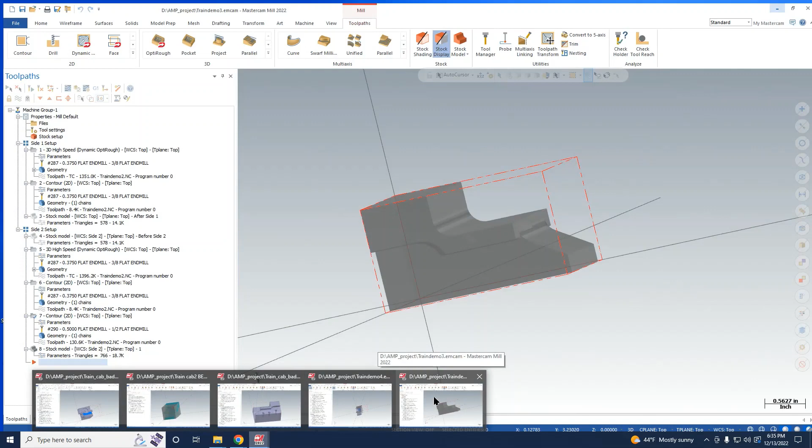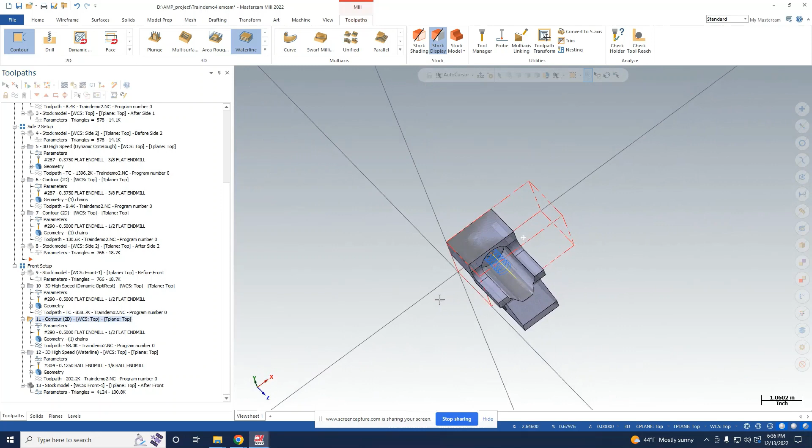I just wanted to add something. The contour pass actually worked, and I think I know why it didn't work before—it's because I didn't align the tool plane with the world coordinate system, so it was machining from like the front.

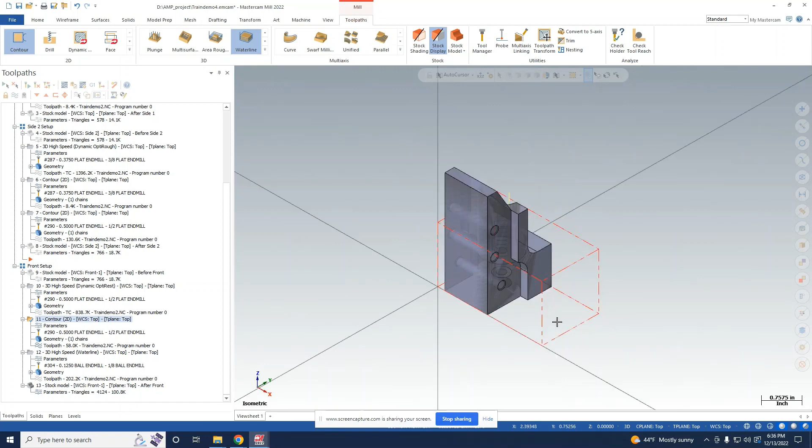You don't necessarily have to align it, but you usually need to understand which orientation it's working from. For example, here we want the tool to go from the top so it can clean it up. Otherwise, if it's going from the front, it's going to machine through the body.

So it's designed to go from the top, so we're going to make sure the tool plane is at the top. Let's delete this, and I'll show you how to do it again.

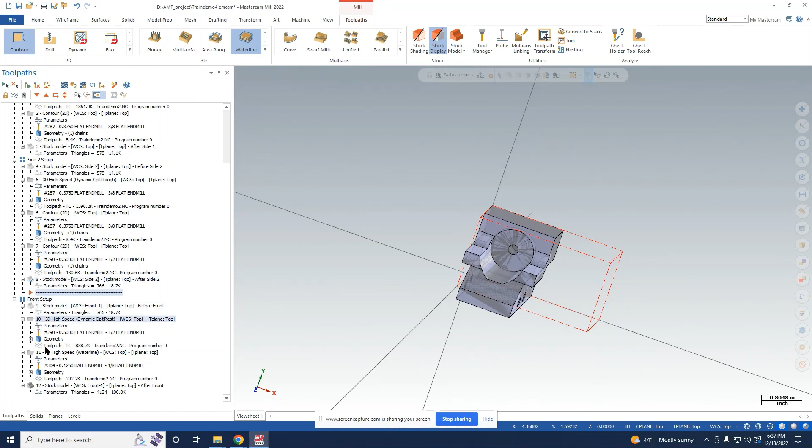First, we need to move the red arrow over here, which tells the program where you want the next pass to be. So we're going to do the contour, and we're just going to select the bottom loop, and we see it's going this way, which is correct.

That's climb milling, rotating clockwise. Actually, never mind—that's wrong. It should actually be going up, going this way. So we're going to reverse it.

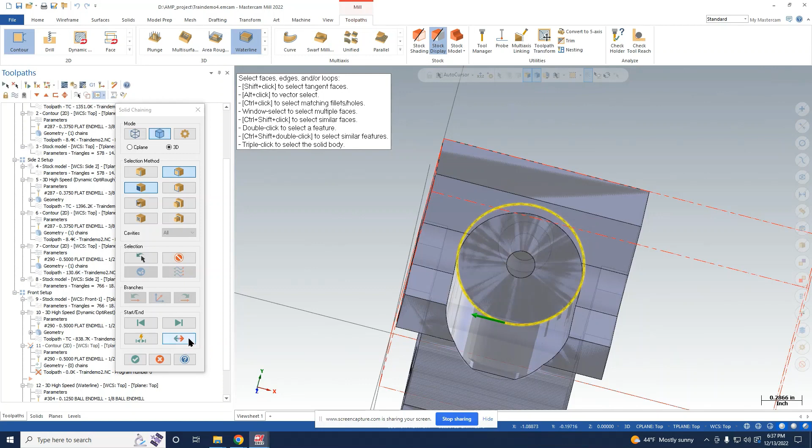Yeah, so that's correct. The parameters are the same from last time using contouring, so pretty good—0.1, and then linking parameters.

It should be correct. I can double check the depth if you just check this. So everything is right—this actually might not be right. So the top of stock is here. Yeah, so it's a little different.

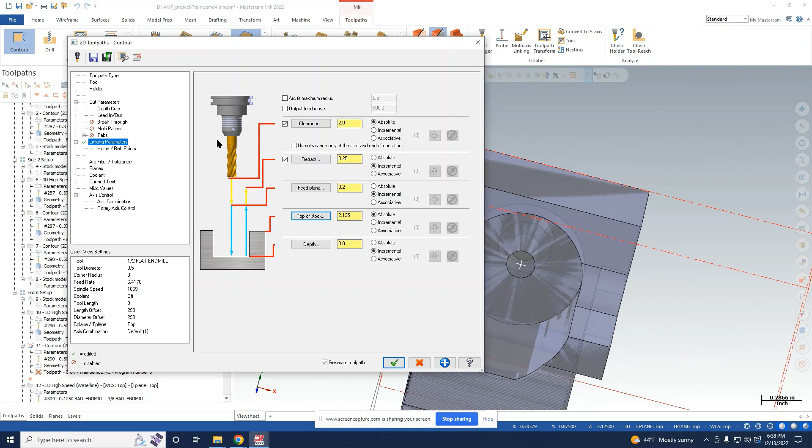The rest is correct. And for the tool, we can just use the same half-inch flat end mill.

It's running pretty slowly—you can run that faster. Spindle speed like 8,000, and then feed rate—I don't know, what's a good feed rate? Good feed per tooth, whoops, 100. Is that a lot? 0.008. Okay.

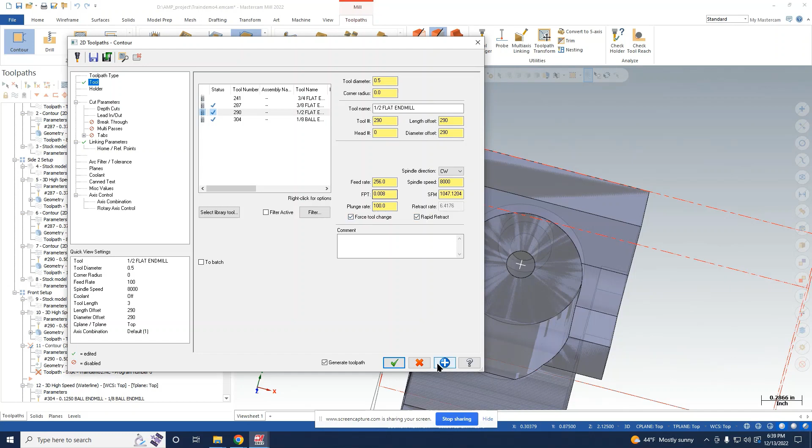Let's see what happens. So that looks pretty good. Let's run it.

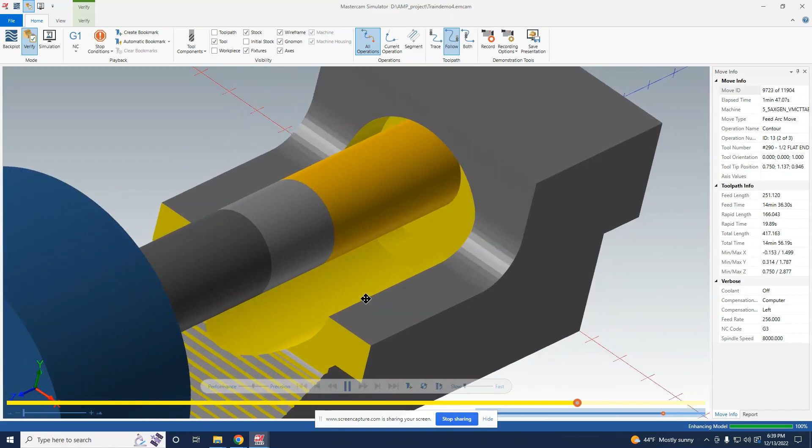We're going to skip the OptiRest again, and we're going to move straight to the contour. It's so quick that you don't even see the tool moving, but it is. Here we can see the surface finish.

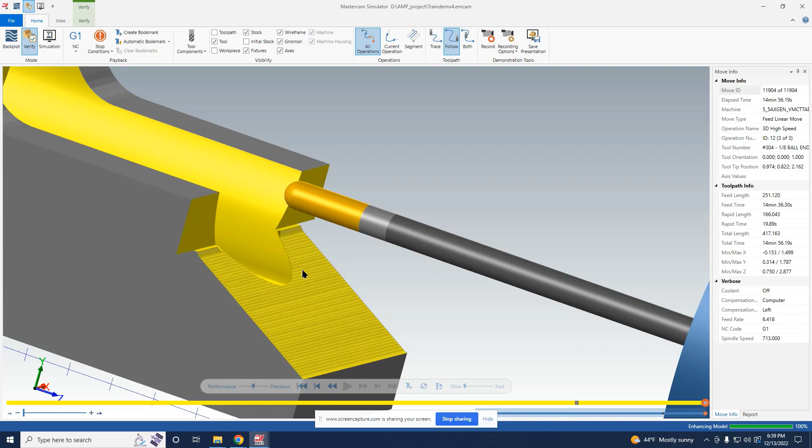We're going to skip the waterline operation, and here we can see the final surface finish. It looks a little better on the pocket—very nice. This is pretty hard to improve unless you reduce these step downs or use angled tool machining or 5-axis.

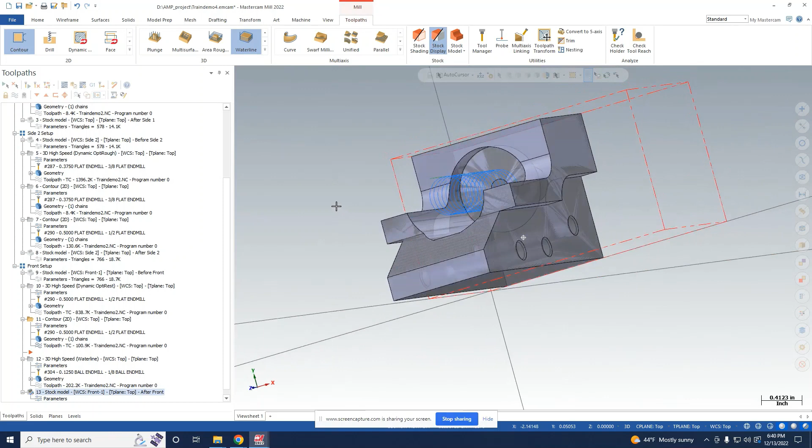But anyways, this is what I wanted to show you guys. So just going to save, and we can re-render the stock model and see—move to preview. We can see what it looks like. It's pretty good, I'm happy with it. So yeah, all right, thanks.

I just wanted to also mention that the way I showed to do the toolpaths is probably not the best way to do it. In fact, I'm almost certain it's not the best way because the way Ben showed is very elegant, but this is just the way I found that worked. So just keep in mind there are probably better ways to do a lot of these things.

But the purpose was to show how to use these toolpaths, and this is one way to use them.